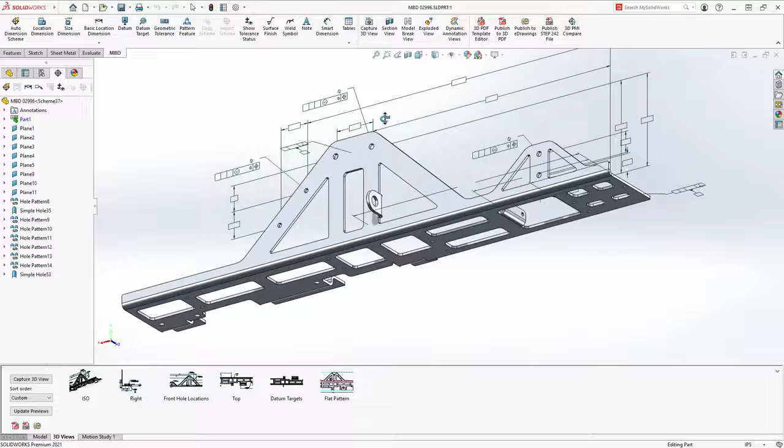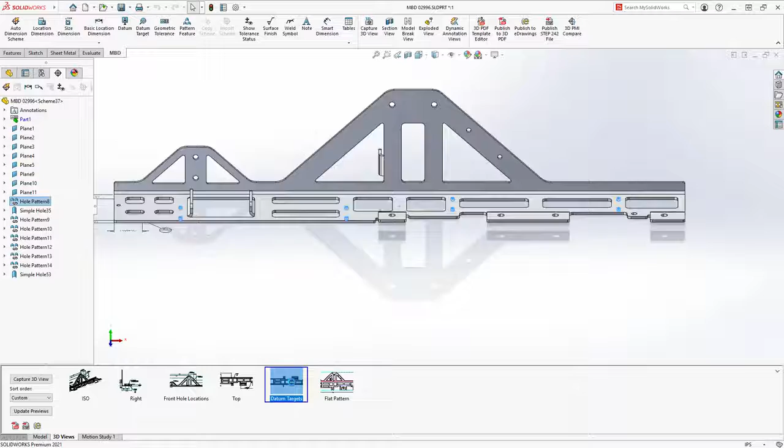SOLIDWORKS MBD provides an integrated alternative to creating 2D drawings, which helps you define, organize, and publish 3D product manufacturing information, or PMI, into industry-standard formats. 3D views provide an easy way to organize information for individual manufacturing operations, capturing model orientation and display of relevant PMI data, removing ambiguity and making it easy to understand.

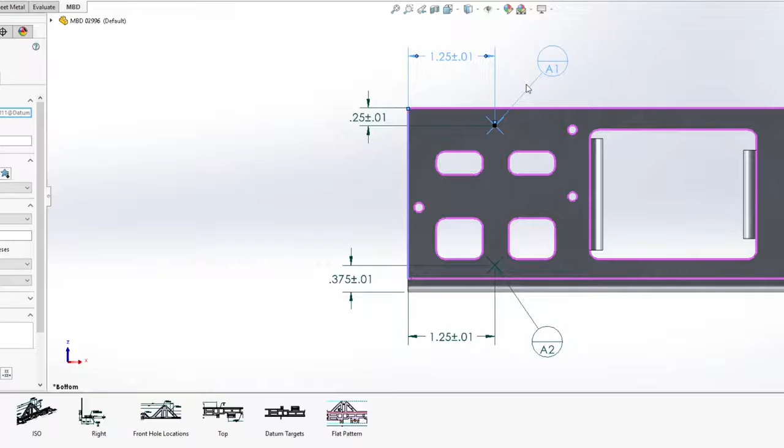Datum targets are useful for defining points or areas of contact to establish a datum to simulate a mating part or fixture. Now, in SOLIDWORKS MBD 2021, datum targets are available in the MBD environment. Locating dimensions can accurately define the location of the datum target and are fully editable, just like any other dimension.

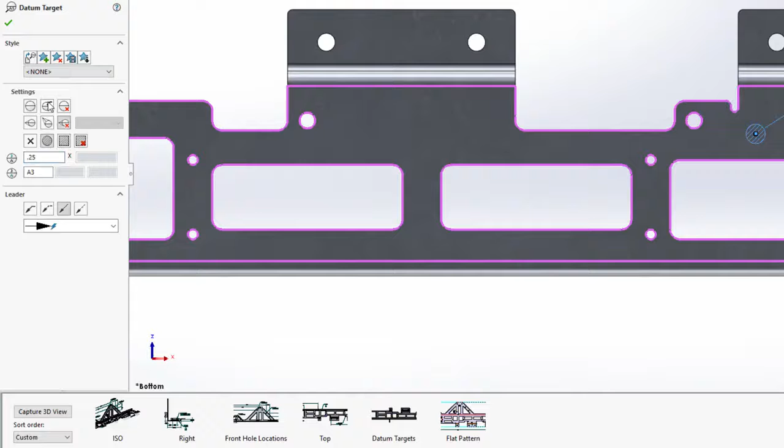Let's set up a datum target on the far end of this sheet metal part. The first selection establishes the datum reference framework, in this case, datum A. Then, place its target and its balloon. The datum target can be defined as a point, circle, or rectangle. For this one, we'll make it a 1/4 inch circular target.

Locating dimensions can be applied to define the position. And for this target, we'll make it 1 inch from the far end. And from the vertical flange, which is datum B, we'll make it 1.75 inches, and our datum target is fully defined.

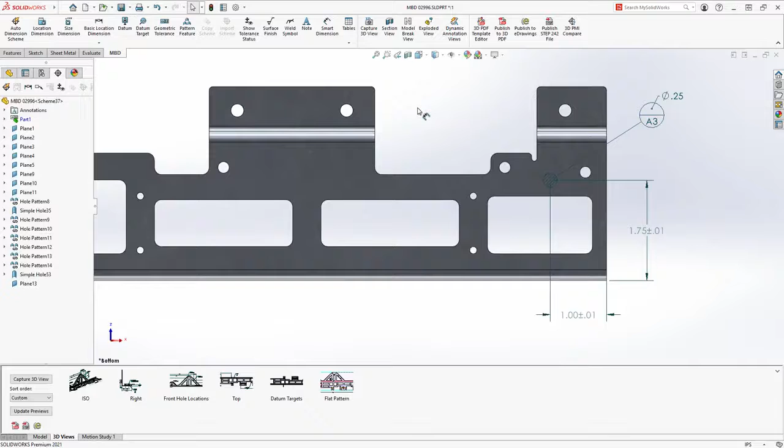Flat patterns in 3D views have been available in the past, including bend tables and bend notes in the 3D view. But now in SOLIDWORKS MBD 2021, this bend table information can be published to a 3D PDF in a clear, concise, tabular format, similar to the way bills of materials are handled.

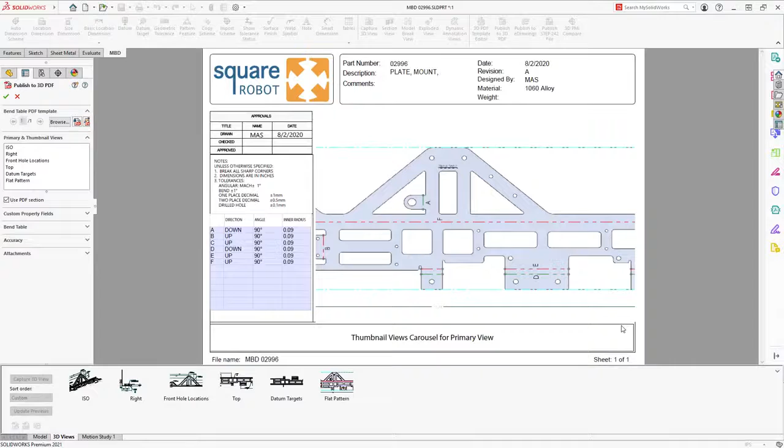For this part, let's attach a neutral 3D format, a STEP file, and also include the flat pattern information as a DXF for laser cutting. All the custom properties are extracted from the part and pushed to the 3D PDF, and bend table columns can be selected for publishing.

3D PDFs are a great way to accurately communicate your design with downstream manufacturing operations who are not lucky enough to have SOLIDWORKS. All that's needed is Adobe Acrobat Reader, and all the views are presented in an easy-to-read and navigate format. All the information about the datum targets is available, and the flat pattern view contains the bend notes corresponding to the tabular bend table on the left.

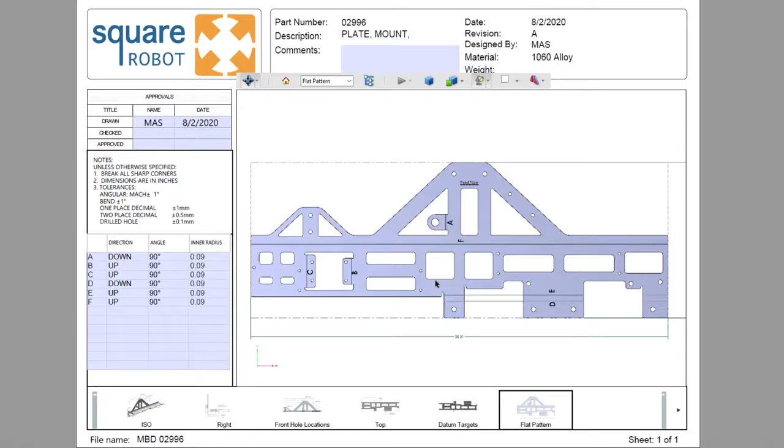With these enhancements to SOLIDWORKS MBD, it's easier than ever to embrace model-based definition to eliminate time-consuming drawing creation and reduce manufacturing errors.